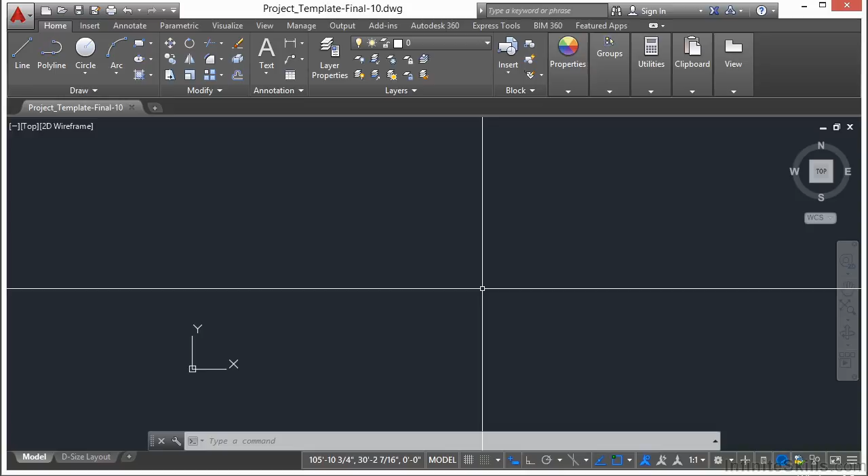We're going to add 2 blocks into the file. So open up your project template file that you created earlier. I create a typical one to start with and then a final version as well so that I have a before and after example file available to you to use. I'm going to save this into my current project folder as the before. So I've saved my file.

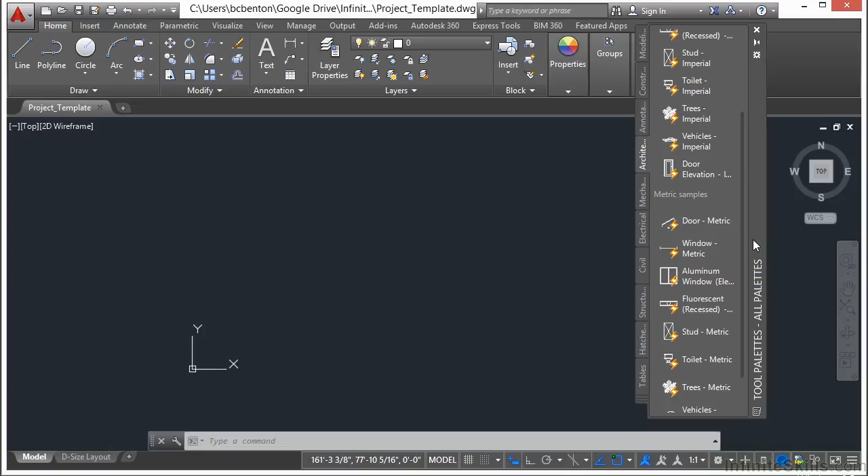Now let's open up the tool palette. Remember to do that, you press Control and 3 at the same time. Let's go to the Architectural tab. Find the window block. It's the window Imperial. They have 2 versions of most of these blocks out of the box, an Imperial version and a metric version. They're exactly the same thing, but one is set up for metric units and the other one is set up in inches. We want the Imperial window version.

Left click on it and insert it. So there's the window. This will insert the block from the tool palette into your file. You can place it anywhere for now. Now let's do the same thing with the door Imperial. Select it and then insert it. And we're going to use these 2 blocks in this file in a later project.

Now the chapter projects are adding all these features, as I said earlier, so make sure you're keeping up with them. We're slowly adding to your skill set and developing a file at the same time for later use. This is the same type of process that you'll use when you create drawings in the real world.

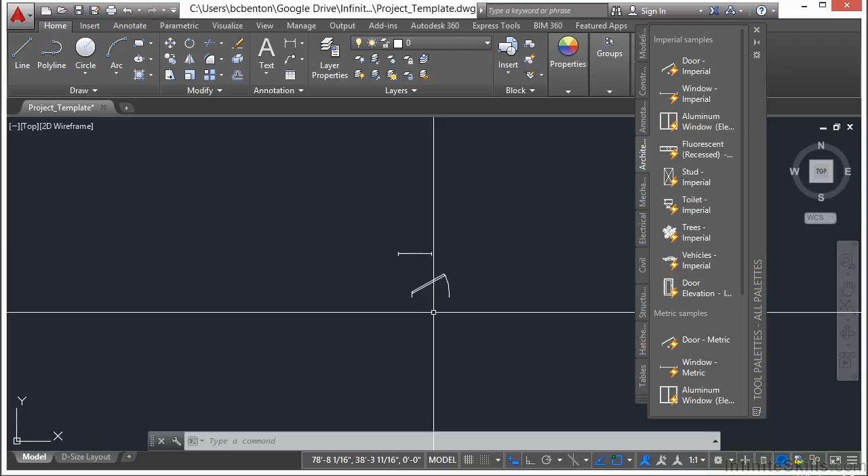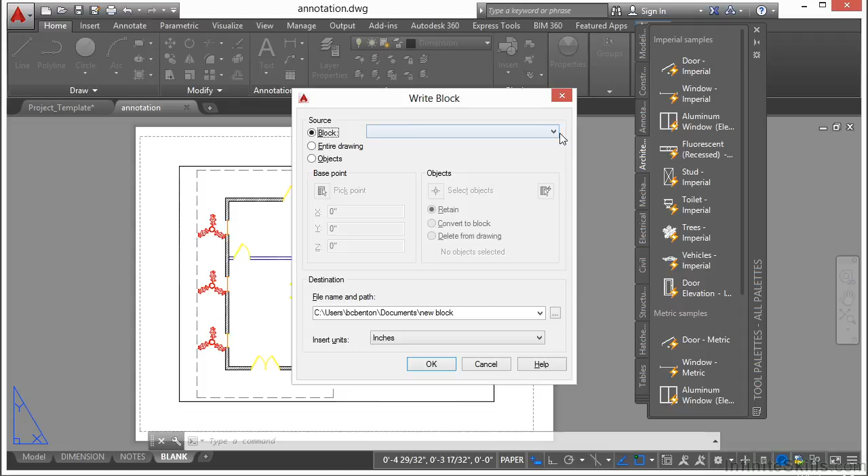Now let's go get the chair that we had worked on in our annotation example file. So go to Annotation, click Open, and from anywhere in the file, we're going to WBLOCK out our chair. So type in WBLOCK, that means write block, and we're going to select the chair block. So pick the block option, go to Chair, and then click here to browse.

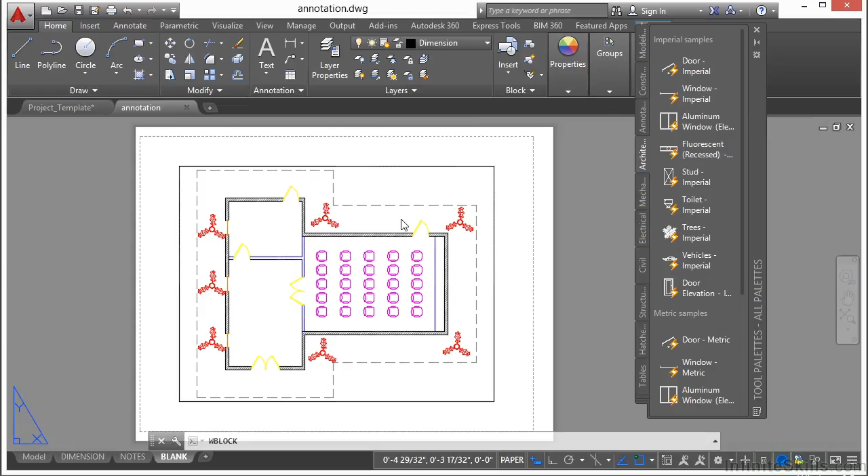Now this is going to save our file where we need it. Let's go to your project files, wherever you've saved them at. And I'm going to overwrite our chair file that we created earlier. Click OK. I'm going to replace it. And so now we've exported our chair block.

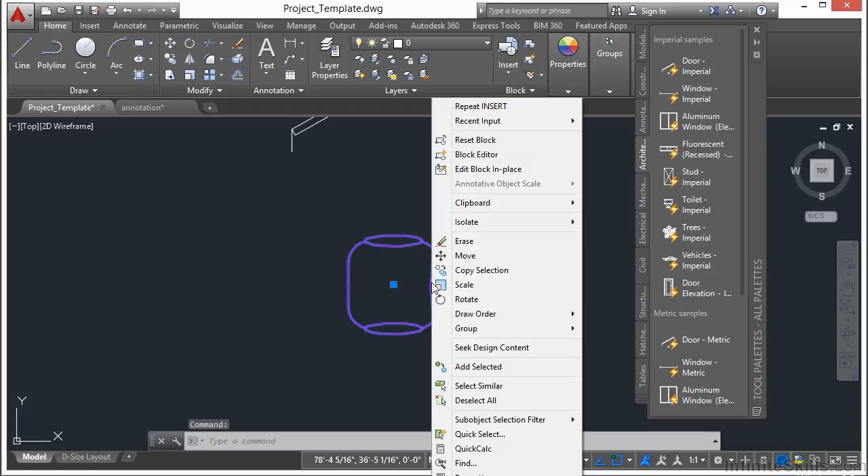Let's go back to our project template file. Go to Insert. And now browse to where our chair file is. Open it up. Click OK. And insert it. Now, I don't like the way this chair is because it's not on the right layer. So I'm going to select it, right-click it, go to Block Editor.

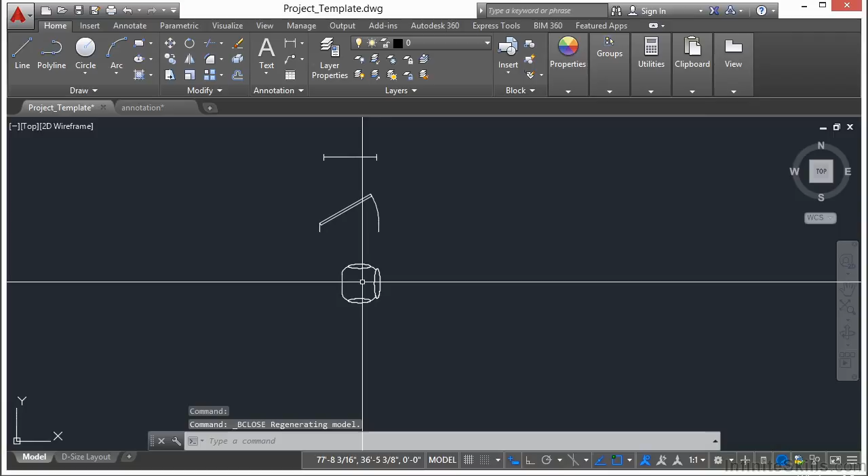Very simple. Select all of it. Go to the Home tab. Click on the layers here and click 0. Press the Escape key. I'm going to close my tool palette and I'm going to click on the Close Block Editor, Save Changes. There, now we have the right block in here and it's drawn on the right layers.

Now we need to create a new block, one for our plant. So let's make sure we're on layer 0. And we're going to draw a circle. And you can draw this anywhere. Start the circle command and make the radius 6 inches. Now let's offset it by 1 inch to the outside.

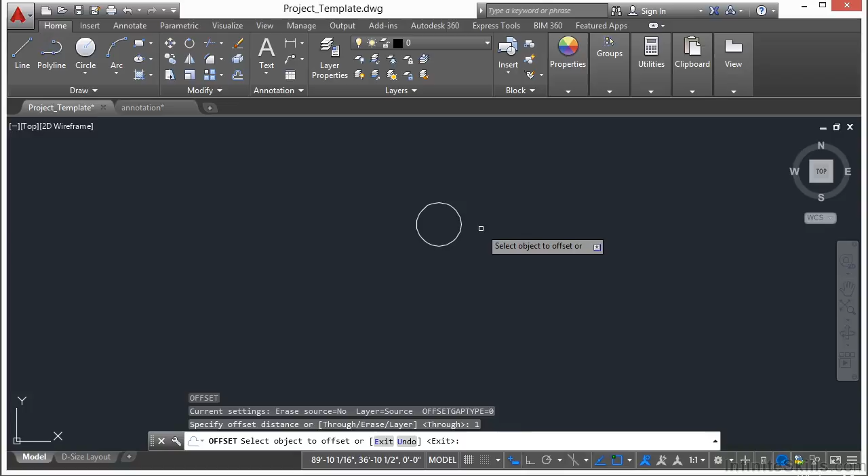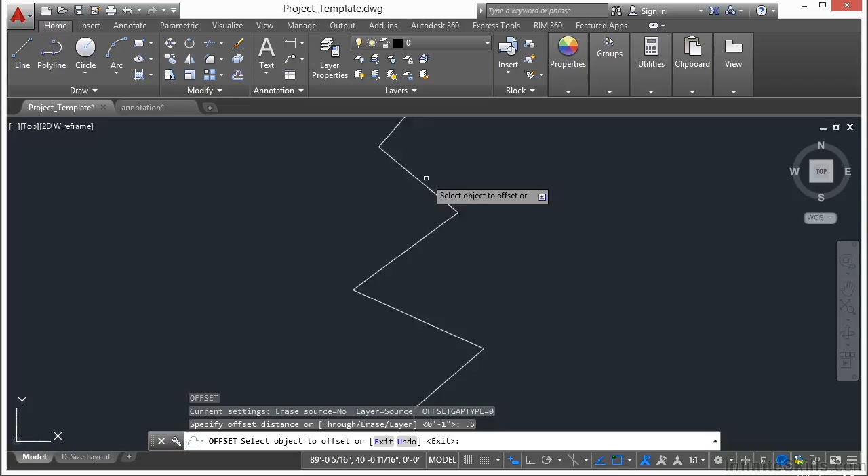Now let's draw a polyline from the center. And you can just draw it straight up. Just draw it out about 12 inches up. I'm going to turn off my ortho now. And what I'm doing is I'm drawing the center of my leaf. Just make it look something like that. Make it squiggle. Now let's offset it again by 1/2 inch, 0.5 to one side and then to the other. Select the center and erase that line.

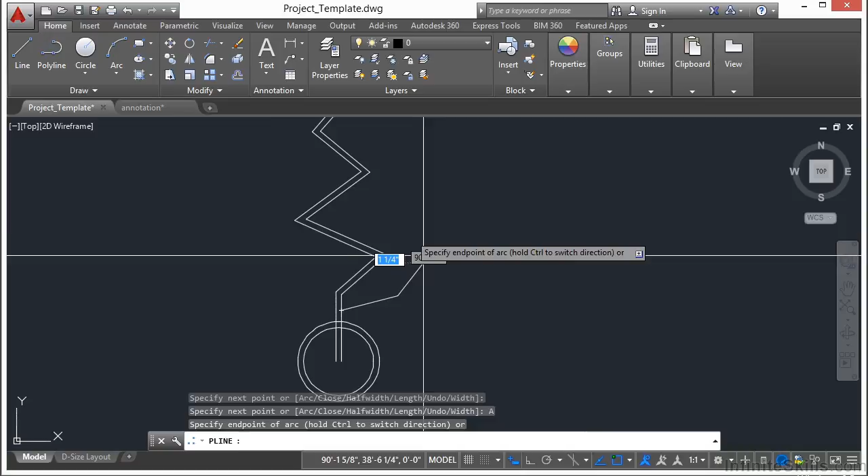Now that we've offset our center line, let's just make some sort of leafy looking shape. I'm going to use a polyline. I'm going to start from here. And I'm going to come out. Put it in arc mode so that it has a little bit of shape to it.

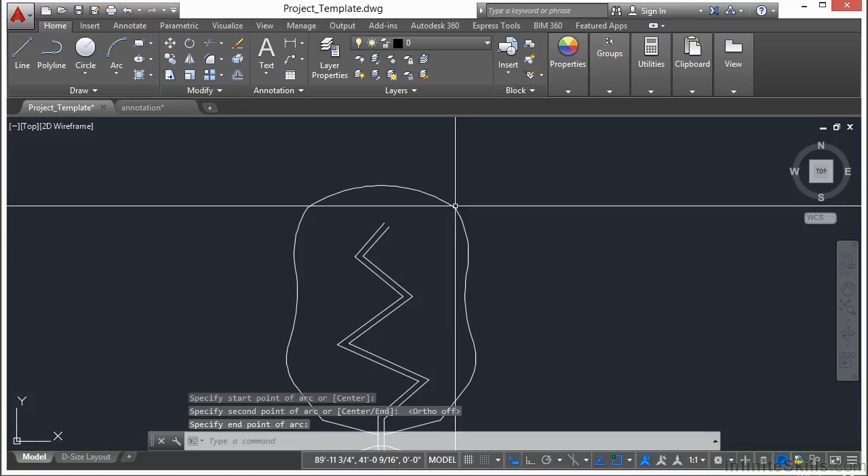I'm going to mirror this about the center line of the circle, turn on my ortho, and then finish it with an arc. Turn off my ortho, just sort of eyeball it. Doesn't have to be perfect. This will get us what we need.

Now I'm going to use the array command. I'm going to use a polar array. I'm going to select these objects, press enter, I'm going to array it about the center. And let's change this to 5. Close the array. Now we have a really big plant.

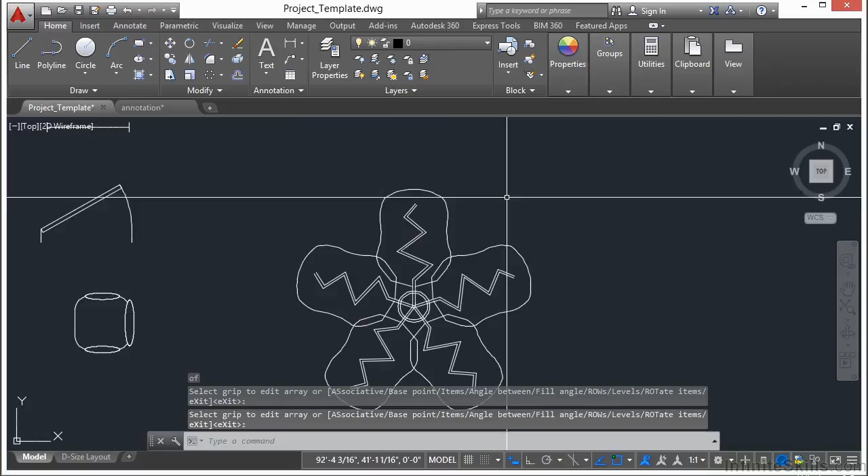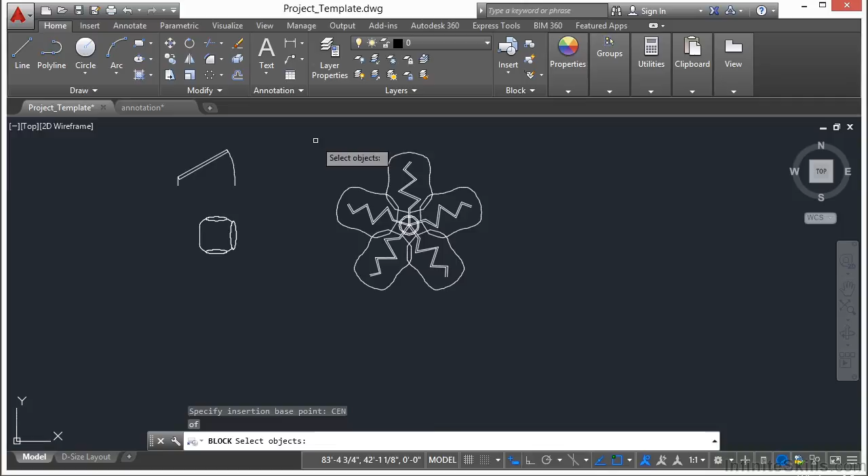Let's make this all into a block now. So type in the word block, press enter. Let's call this block plant. We need to pick our base point. That's going to be the center of this circle. Now we're going to select the objects. I'm going to pick all of that there. Press enter. There's our preview and OK.

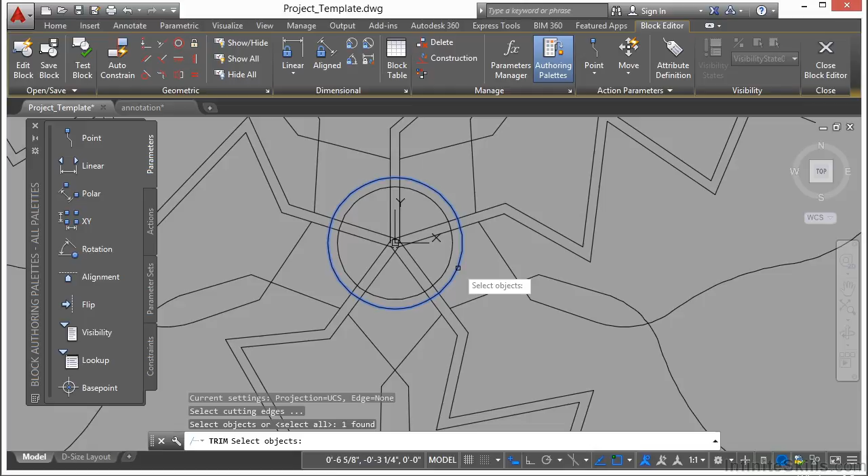There's our block. Let's right click on it. Block editor. Let's use the trim command. And let's trim all these lines. I can't trim them because they are an array. So I'm going to explode the array, and now they become regular lines. I'm going to trim them about this circle and clean that up. Close the block editor, save the changes to plant, and there we go.

Now our template file has a door, a window, a chair, and a plant that we're going to be able to use later on.